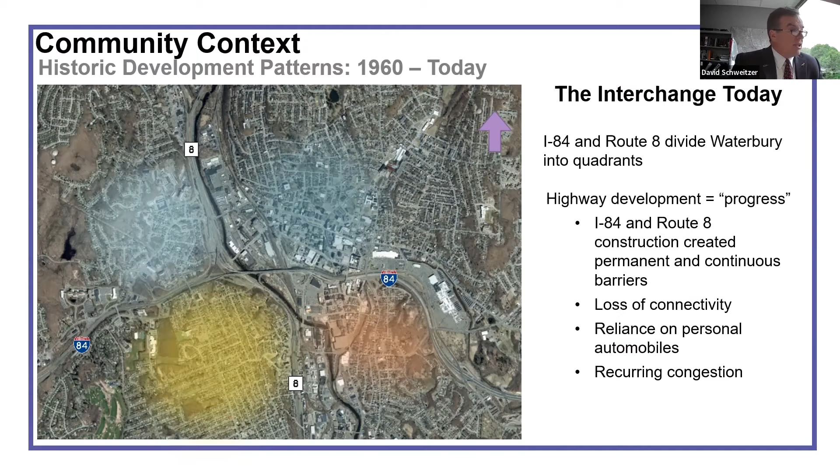Next slide, please. The Mixmaster was built over a series of projects over a 20-year span at a cost of about $48 million. This picture is looking at 84, looking east toward the South Elm Street Bridge, with Our Lady of Lourdes Church and Sacred Heart High School off to the left. Next slide, please.

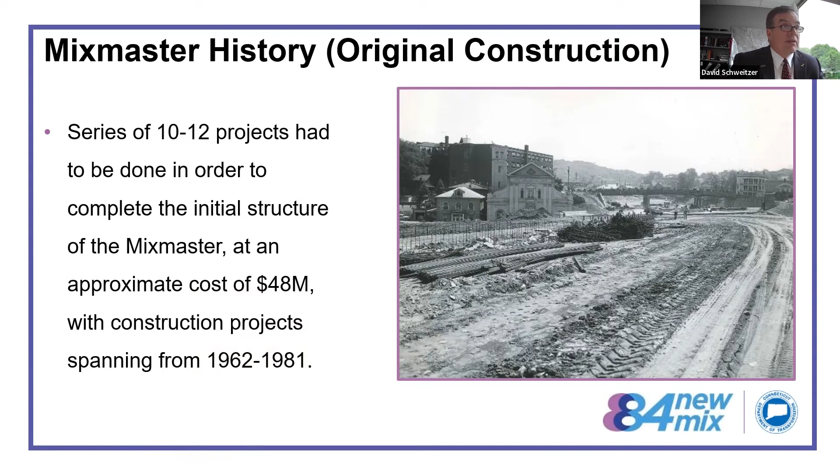Since then, there have been many rehab projects on the Mixmaster, including the current ongoing rehab project. With this project, we've replaced the decks on Route 8 northbound and southbound, and we've done a lot of steel strengthening, repairs, and deck rehabilitation. The goal of this project is to add 25 years of service life to the Mixmaster until we can get into replacing it with the new mix.

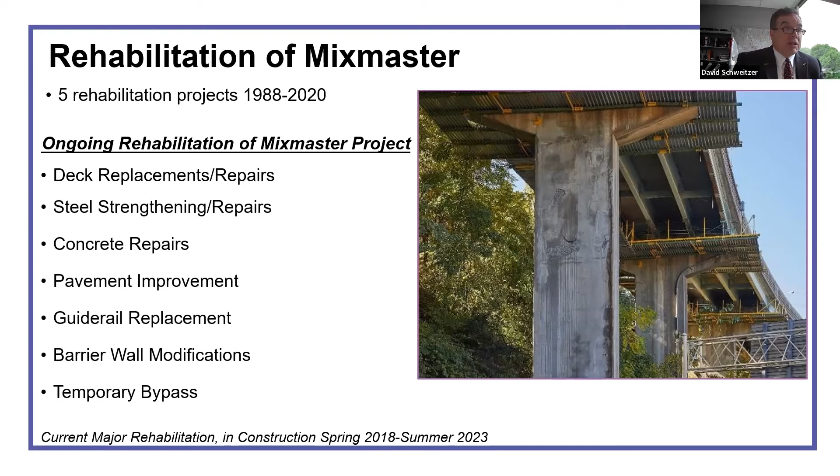To provide an overview of the new mix, I'm going to hand it over to Jake. Thanks, David. If you go to the next slide...

This map shows the area in blue of the study area that we're including in the overall reconstruction study. Why did we do that? We wanted to examine a wider range of design options that exist beyond just the core of the interchange.

If you go to the next slide, we wanted to evaluate considerations in the study area that included the entrance and exit limits, the interchange itself, the major arterial intersections, the local road network, as well as cultural and historic resources within this larger study area.

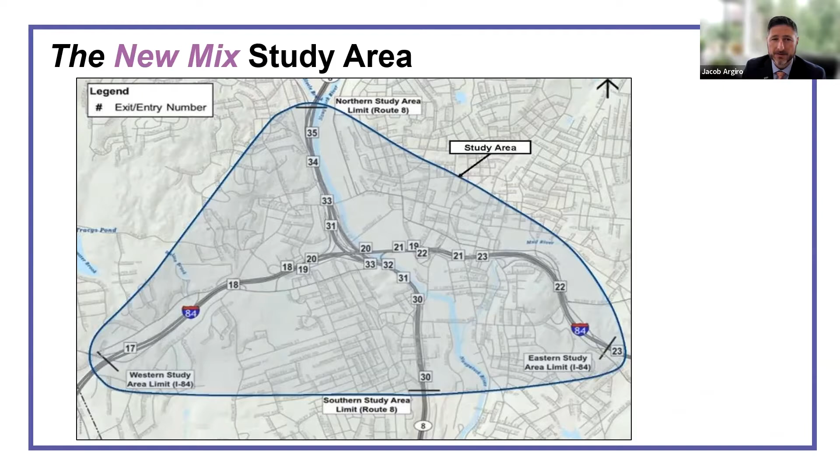On the next slide, we're going to talk about the long-term future known as the new mix. The new mix program is in its early phase of determining the solution for the overall interchange for I-84 and Route 8 as it reaches the end of its serviceable lifespan, which is approximately 2045.

It's anticipated that this will be phased over a number of projects over a longer period of time, with an overall goal that will help modernize, improve safety, and the functionality of the interchange, and reduce congestion, all while aligning the project with the city's economic development and community goals.

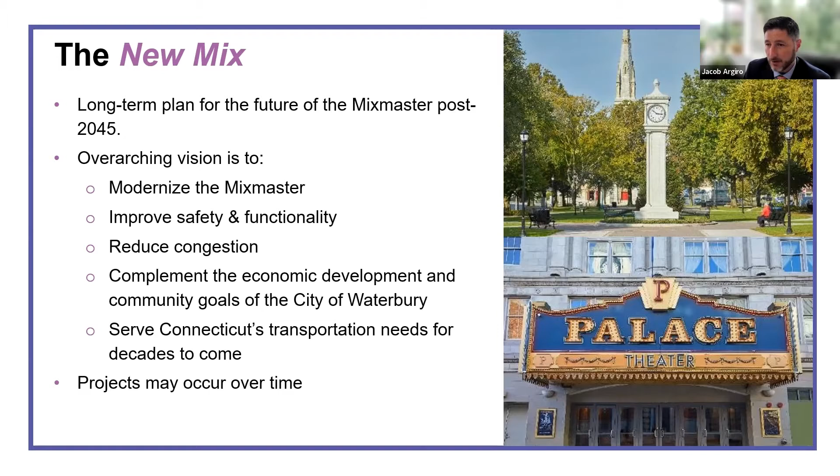Next slide. So the types of projects that we're initially looking at: the phased project approach is being done so that this will allow the state more preparation and more effective distribution of funding for this and other major projects in the state. It also helps lessen the traffic impacts during construction over that period, by reducing the volumes jumping on and off of the interstate. Let me get into that in a minute.

So we're going to start with early action projects. These are projects that have independent utility, meaning they're not directly linked to the full replacement of the project, but they're enabling projects that will help improve deficiencies of local roads as well as highway deficiencies, and these can be introduced early on. They're going to help reduce volumes from using the interchange, meaning jumping on and off to get across town.

The near-term projects are another type of project that we're looking at, and these are actually tied and linked to the overall replacement or reconstruction of the interchange. They can be initiated long before the full core of the interchange is replaced. But again, that phased approach helps alleviate some of that financial burden on the state, as well as lessen the traffic impacts within the city.

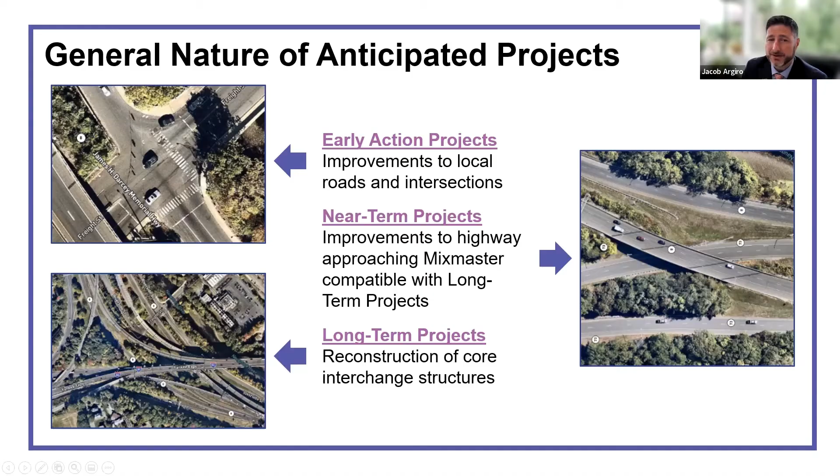So let me hand it over to Naomi Hodges, and she's going to walk through the process that we're using to study this, known as PEL. Thank you, Jake. As noted earlier, the New Mix program's future project is not slated until the 2040s. However, a project of this size and complexity necessitates planning well in advance of its projected start. Right now, the New Mix is in its initial early planning process, and that process that we are using is called the Planning and Environmental Linkages study process.

Before I get into my part of the presentation, I'd like to show a video to start explaining a little more about the PEL process.

The life cycle of a transportation project begins with the transportation planning process and is followed by environment, design, right-of-way, construction, ending with maintenance and operations. The traveling public and taxpayers are challenging agencies to accelerate the project delivery process and improve efficiency without compromising public input, safety, and environmental laws. Planning and environment linkages, known as PEL, promote the use of the information, analyses, and products developed during the transportation planning process to inform the environmental review process, including the National Environmental Policy Act, or NEPA. This collaborative and integrated approach leads to better environmental results, considers environmental, community, and economic goals early in transportation decision-making, and helps decrease project cost, schedule times, and redundant efforts.

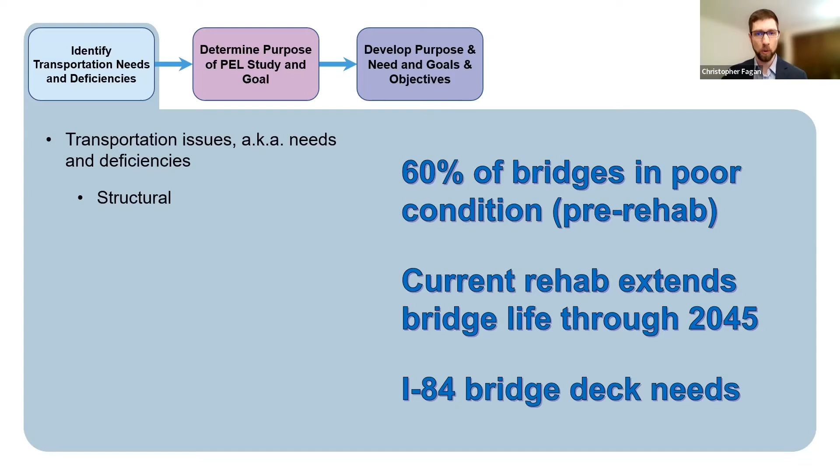The bridge deck needs of the stacked I-84 structure are of particular interest. Complete replacement of these bridge decks has not been attempted because of the traffic delays it would introduce on I-84. As a result, most of the stacked I-84 bridge decks are original 1960s construction, and this will need to be addressed in the New Mix project. Taken together, structural needs are a primary reason the New Mix PEL study is being performed and why 2045 was selected as the study's future design year.

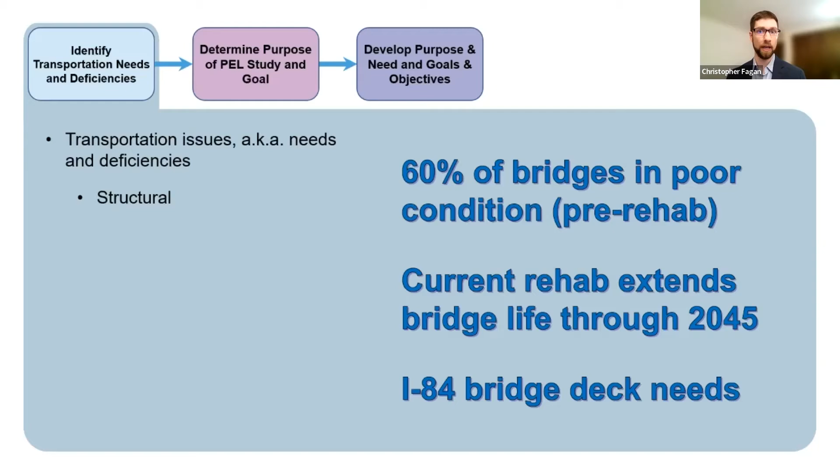Moving on to the next category, geometric needs include deficiencies of the I-84 and Route 8 highways in the study area. Roadway geometrics include things like shoulder widths, horizontal alignments, and vertical profiles, and all of these characteristics significantly affect the capacity and safety of a roadway network. The Mixmaster's geometric deficiencies were identified by comparing its geometry with modern highway design criteria. While the interchange was innovative for its time and conformed to the standards of its time, highway design has continued to evolve since the 1960s.

In this picture, we're looking east along I-84 at downtown Waterbury. Certain features you can see here, like left-hand entrances and exits or closely spaced ramps, just aren't desirable in modern highway designs. The narrow shoulders throughout the interchange are a source of driver discomfort. These deficiencies result in speed differentials between vehicles maneuvering, weaving, merging, and diverging, and they've only become more notable as vehicle top speeds and traffic volumes have increased. A detailed accounting of all the geometric deficiencies our team identified can be found in the Analysis Needs and Deficiency Report on the website. Addressing these geometric deficiencies is another high priority for the New Mix project.

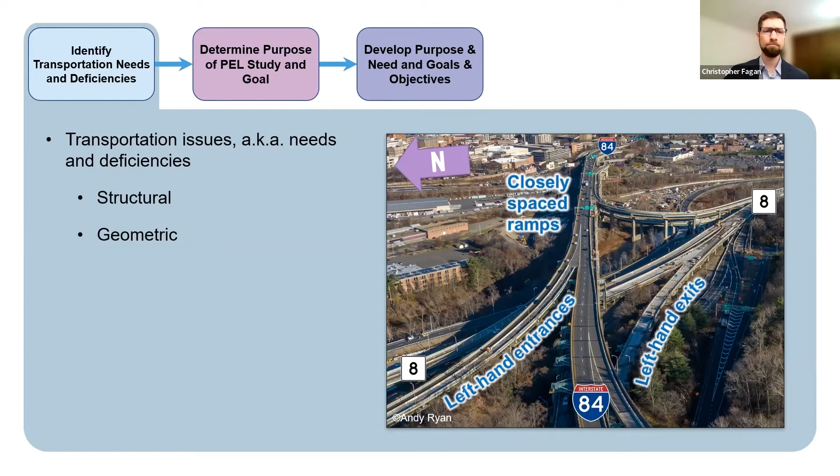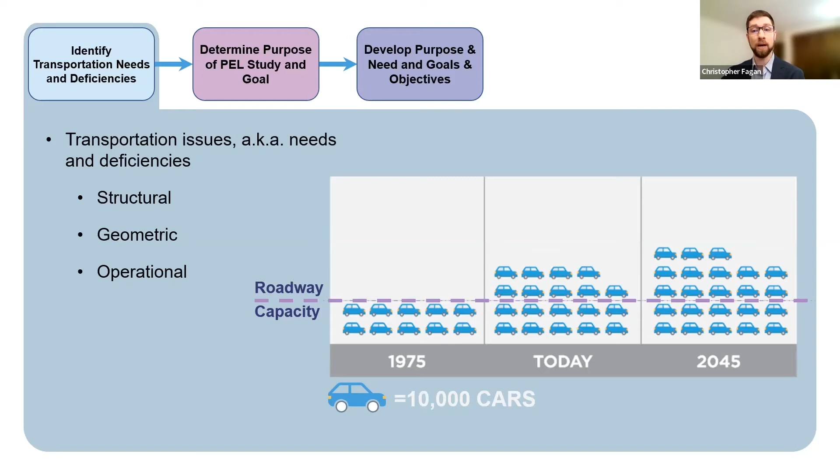Our team established the future traffic volumes by collecting traffic data and developing various computer simulations and models. In addition to predicting traffic volumes, these models help quantify traffic performance levels under differing conditions. The models the team produced show a marked increase in operationally deficient highway segments and roadway intersections by the year 2045, which is a significant future need. Details of all the operationally deficient facilities within the study area can also be found in the project's Analysis Needs and Deficiencies report.

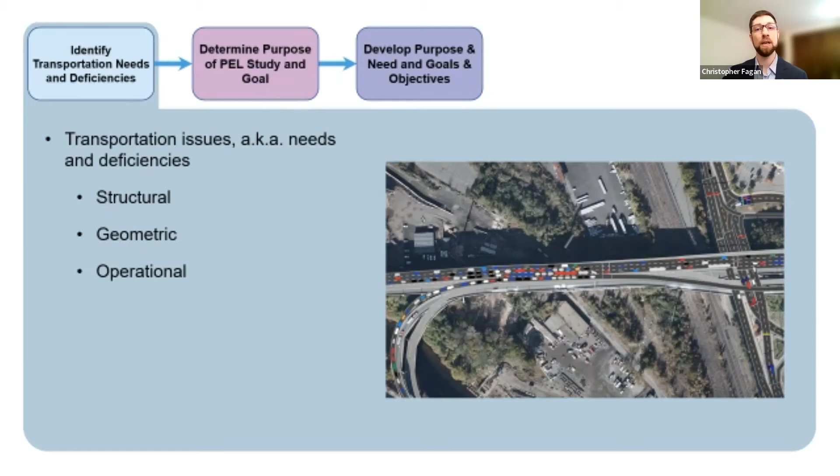Another aspect of traffic operations are safety conditions. The team studied crash data for the project area to understand the factors causing crashes. We noted that on I-84 specifically, the crash rate was about 30% higher than the statewide average for all roads. This high crash rate contributes to non-recurring traffic delays on I-84, and it's significant because crash rates for highways are typically expected to be lower than the statewide average.

It should be noted that this data was collected before the I-84 widening project was completed, and that it may have been influenced by construction at the eastern study limit. So it's very likely that crash density has changed now that there are 3 continuous lanes in each direction of 84.

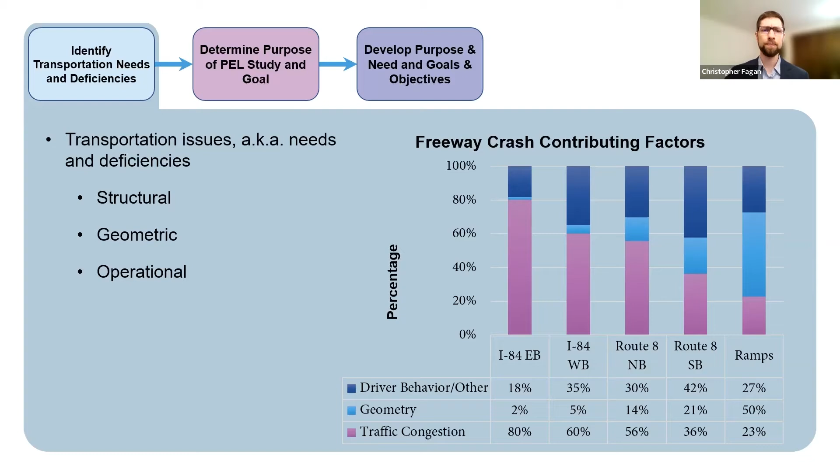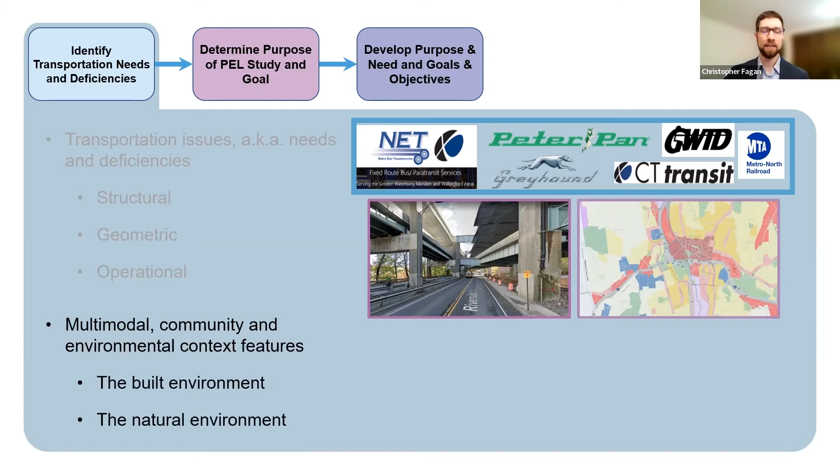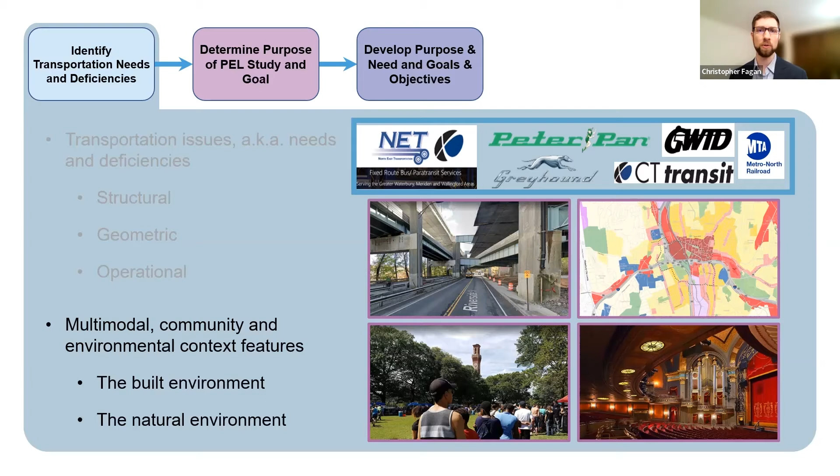Another aspect of area context are the built and natural environments. How the Mixmaster interchange fits in these environments will inform future development of project concepts or alternatives, as we call them. The team performed research and sought community input to help develop our understanding of community context, and we received that input from stakeholders, the project advisory committee, and through a website poll, so that we could identify features of significance like parks, landmarks, and other important community resources. We're also looking to get more of that input from you today.

Finally, a thorough desktop study was performed to document the environmental features in the study area that make up the natural environment, such as rivers, wetlands, and species of concern. The results of all of these investigations are in that analysis report that is available on the NewMix website.

Last but not least, for this study step, we did want to note that a very robust presentation on the needs and deficiencies of the interchange was provided to the project advisory committee in December of 2021. That presentation is available for viewing through a link to a YouTube video on the website's project advisory committee materials page, so anyone interested to consume this data in more detail can see that information at that link. So now Naomi is going to continue on with the next study step.

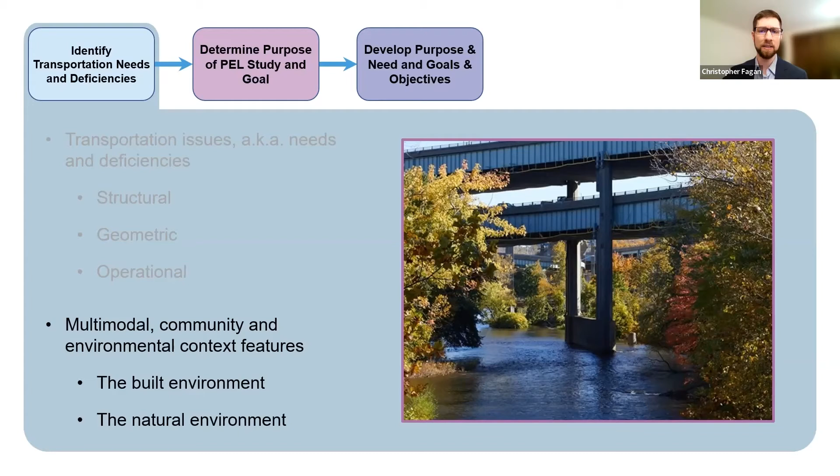It does need to get broken down a little bit more, and how we've done that is through developing the purpose, need, and goals and objectives, which was the next step. So just to give some background on what a purpose and need statement is, we consider it to be the foundation of the decision-making process. It establishes the basis for development of conceptual alternatives, or potential solutions as we call them.